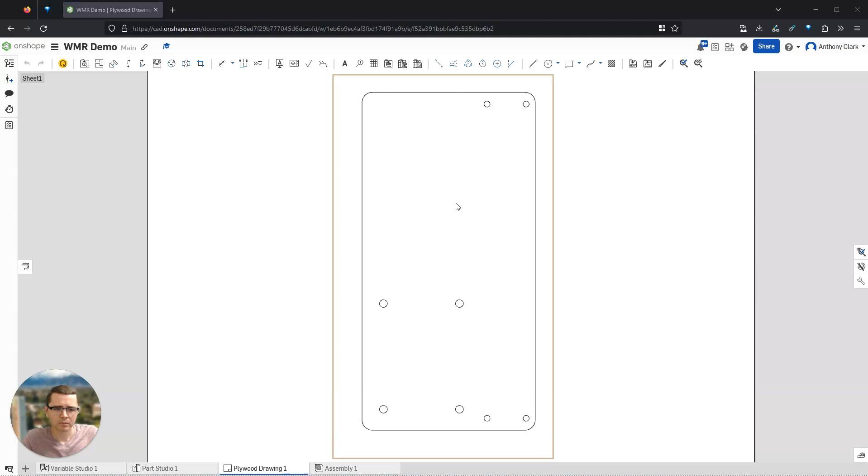Alright, we've seen laser cut parts. Now let's jump into creating a 3D printable part.

I'm going to create this in a new part studio, though technically we could do it in the same part studio we had here. Let's call this the chassis, and let's call this one a wheel.

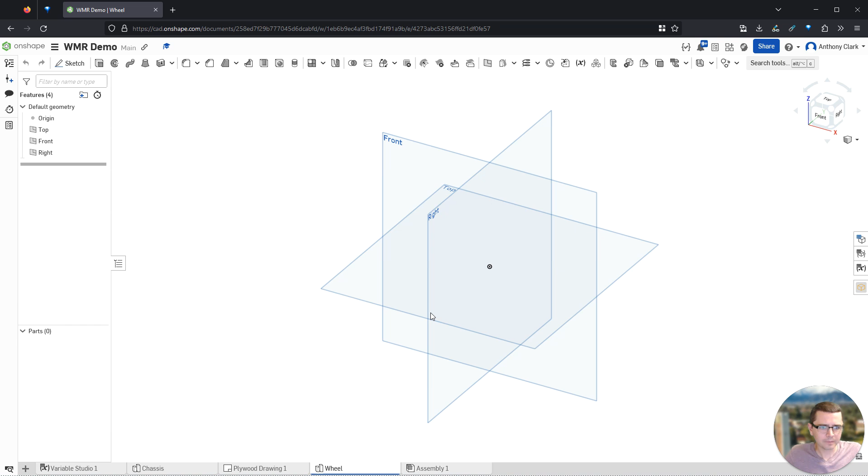Instead of on the top plane for this one, I'm going to create this one on the right plane. And since this is a wheel, it makes sense to make it a circle. This one is going to be a little more freeform, a little less.

Values from the variable studio that we already have defined. So we'll call this the wheel rim.

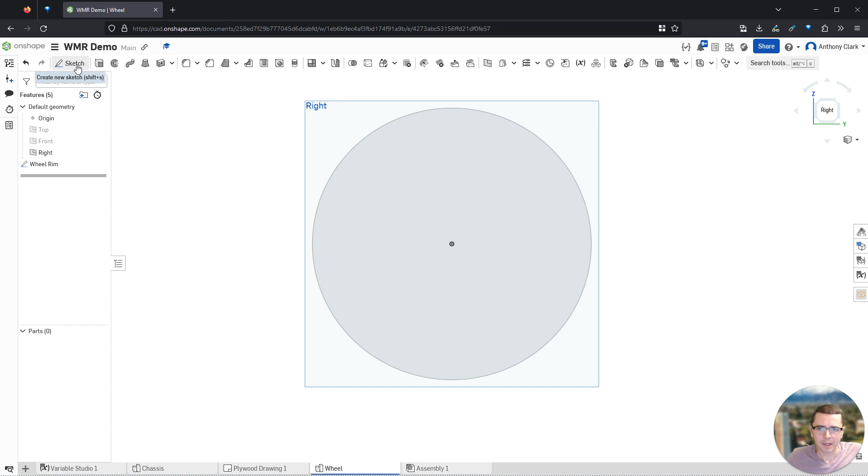And I can now extrude this. Extrude this part, and let's make this a certain thickness.

Sometimes it is nice to still have variables even if they're not defined in the variable studio. Maybe I'll need this dimension a few times still. So I'm going to type the pound sign and call this the wheel thickness.

Turns out I've already got that defined elsewhere. So let's call this the demo wheel, the demo wheel thickness. And I can click create new variable, and let's say that this thing is 0.8 centimeters thick, which I think is what I had before too.

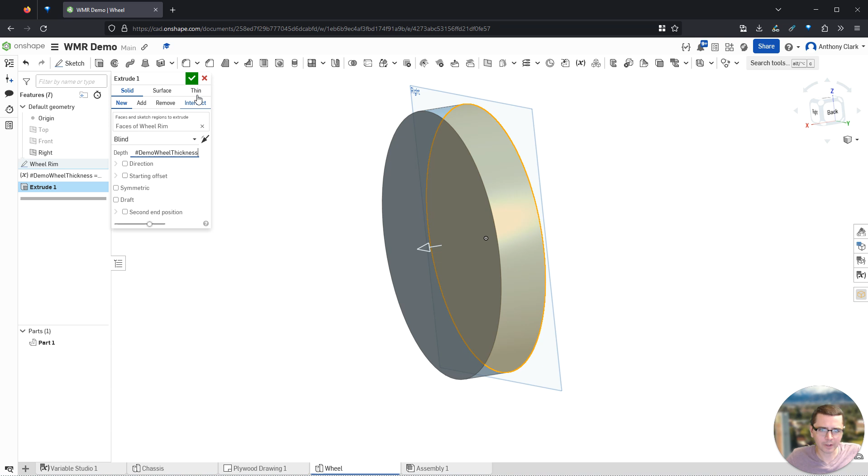You can see here I can create lengths, angles, just numbers, or any. We'll click OK, and let's call this the wheel rim.

You'll notice that it created the variable right here in place instead of in the variable studio. So this only shows up here. It does not show up in the other variable studio. Let's do something similar here.

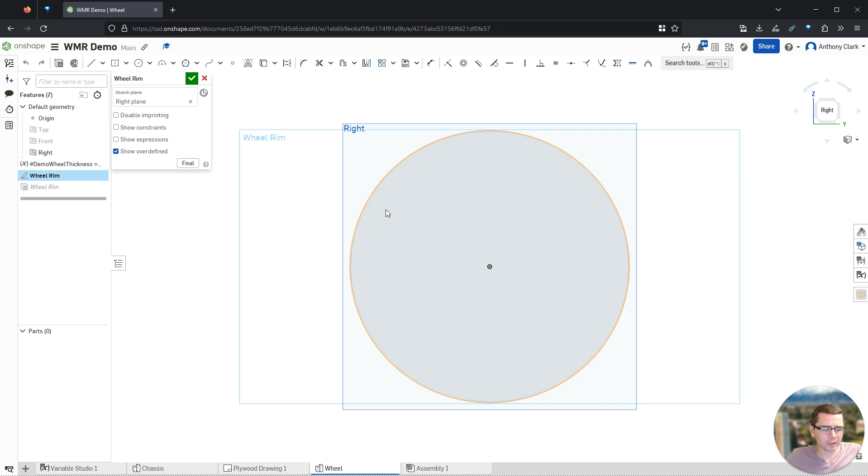I'm going to go actually and edit the sketch itself. I never actually dimensioned it. Let's dimension it to 7 centimeters, which is what the Pololu wheels are that I'm using on my demo robot.

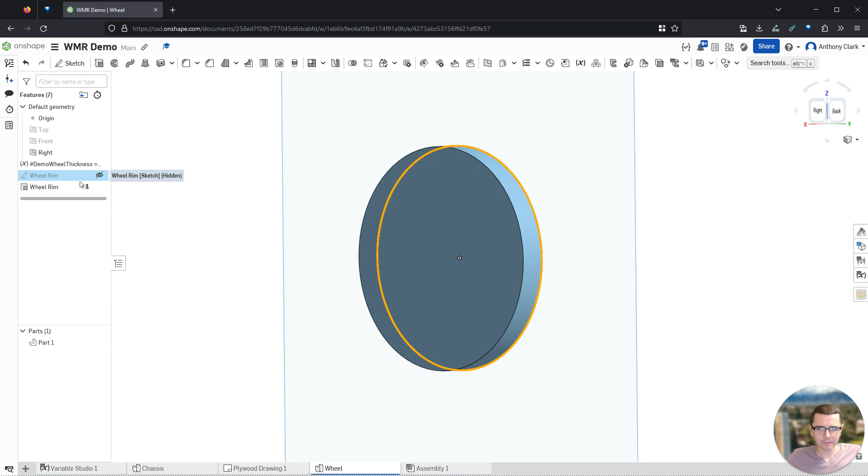Okay, so 7 centimeters. But instead of it being a full thick wheel like this that I'm cutting out, let's just do the rim. So I'm going to re-edit this sketch, do another sketch, do another circle, and let's see, how thick do I want this to be?

Let's leave that as it is for now, and let me show you a few extra little features here that are useful.

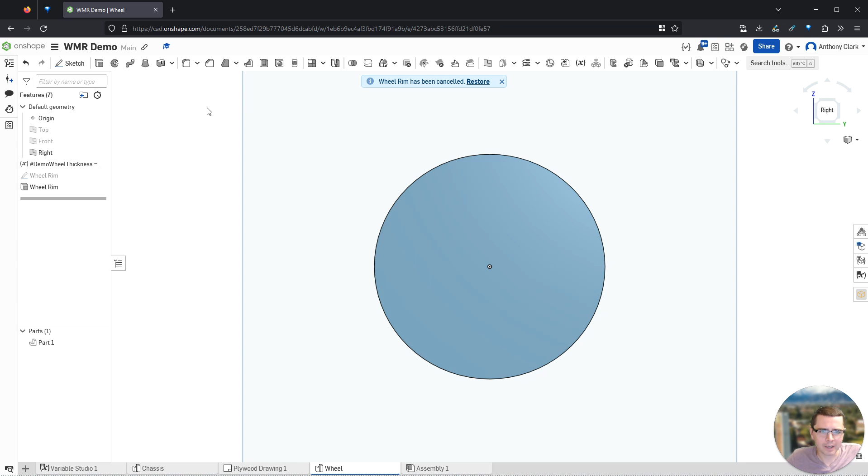Let's see, where do I create variables? Do I have to be outside of a sketch for that? Here we go. So let's click variable, and I'm going to do a measured variable.

And let's call this the demo wheel diameter, and let's just click on here. And I think, let's see, what am I going to get as the value?

Not generated properly. Let's see, it's a length. Not the edge, no. So is it a distance? Use an axis.

This may be a mistake. Measure the distance between the vertex and the edge. It's not complaining anymore, but I can't tell what that actual value is. 3.59.

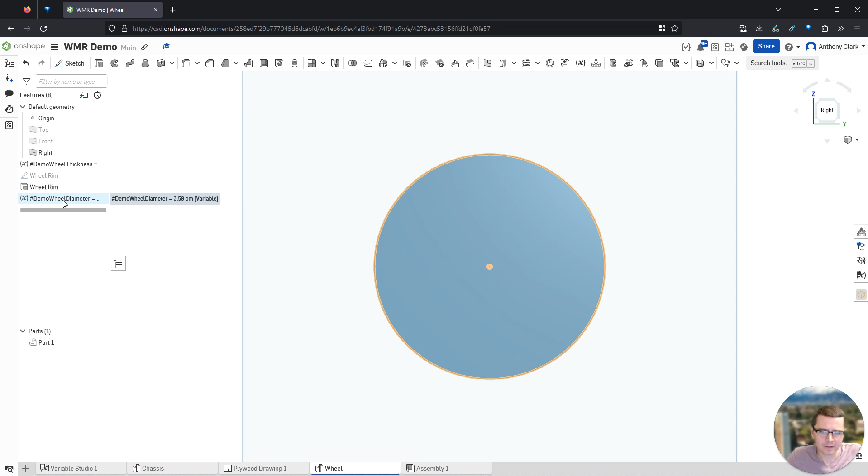I think I am not going to just try to fix this off the cuff here. I was just trying to show that you can create variables based on measurements.

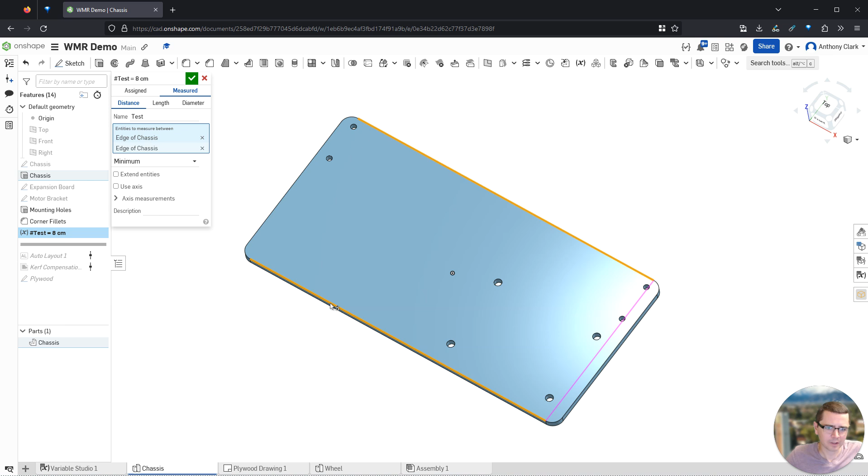So for example, let me just show you one that I know should work. I can create a variable, let's call it a measured variable, let's call it the test, and the entries to measure between - for example, I could select this edge and get the minimum distance, and it says it's 8 centimeters, which makes sense because that's what we made this length over here.

Let's not slow down too much by me trying to figure that out here on the fly though. Okay, so back into our wheel sketch, back to normal. I'm going to create another circle here.

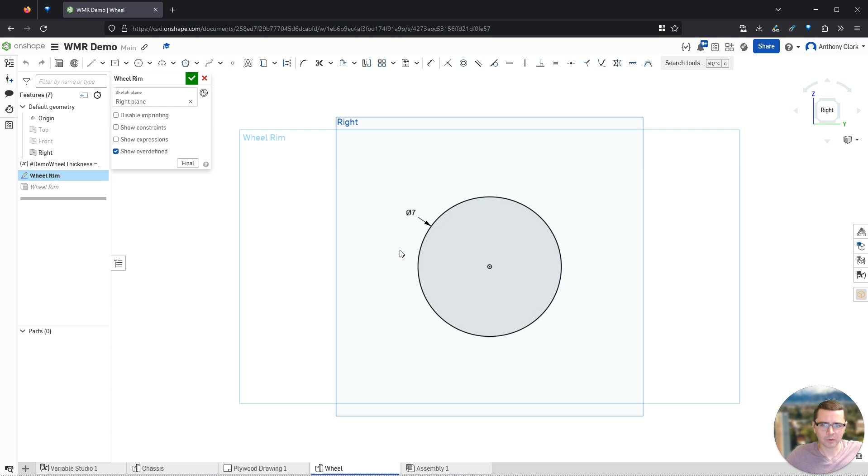And just manually say that this thing is 7 centimeters minus - how thick do I want the rim to be? Let's just try 1 centimeter to begin with. That seems pretty reasonable, 1 centimeter thick edge rim there.

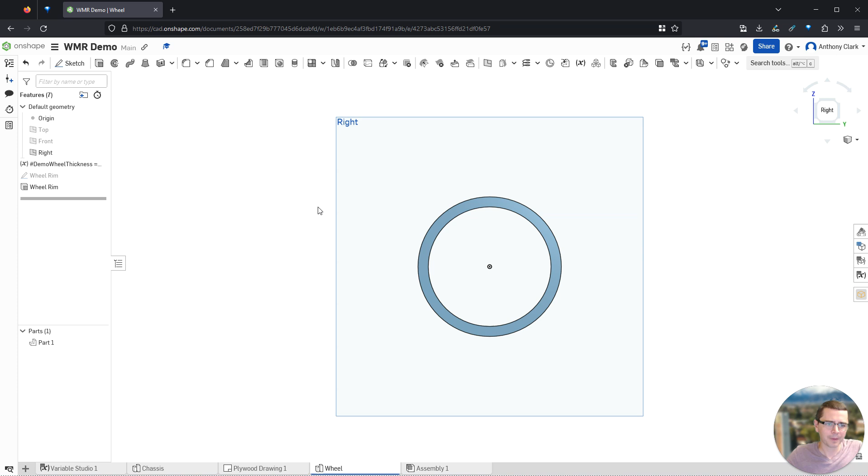And since I have both of those, you can see it essentially did a cutout for me. It just extruded the area between the two circles. Okay, but I'm going to have to eventually have a center hub here, and I need something to attach that to. So I'm going to take my right plane, create a sketch, click normal.

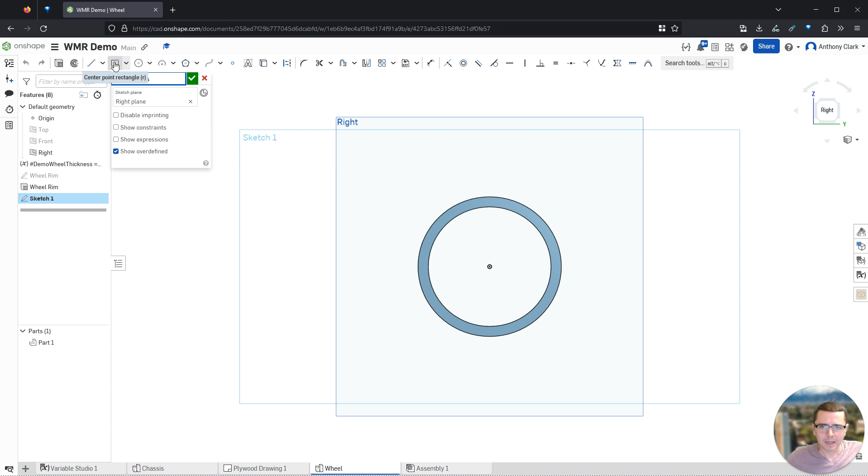Let's call these the cross spokes. And I'm going to be sort of just lazy here and do a center point rectangle and not care too much about the dimensions themselves.

Oh, let's see, the center spoke, let's see, 1.25 centimeters seems pretty reasonable. And now that's fully dimensioned.

Probably would be better to create a variable for those so that if I change one, it changes both, because now I might have to change them both manually.

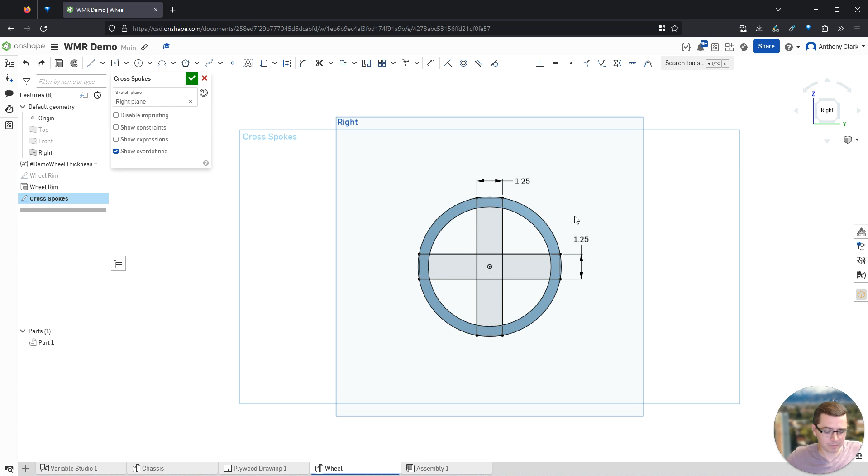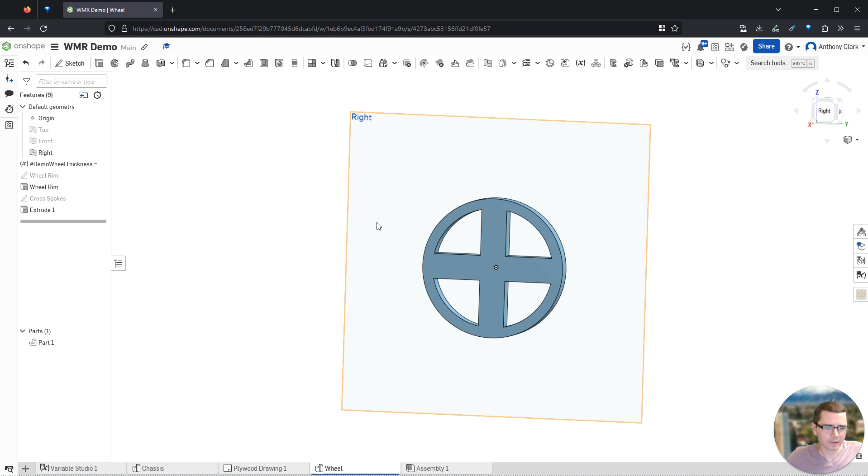We can do an extrude, and Onshape is smart enough to figure out the overlapping regions for that. And I should make this the same demo thickness. Alright, so now I have a wheel here that I can put a center hub on.

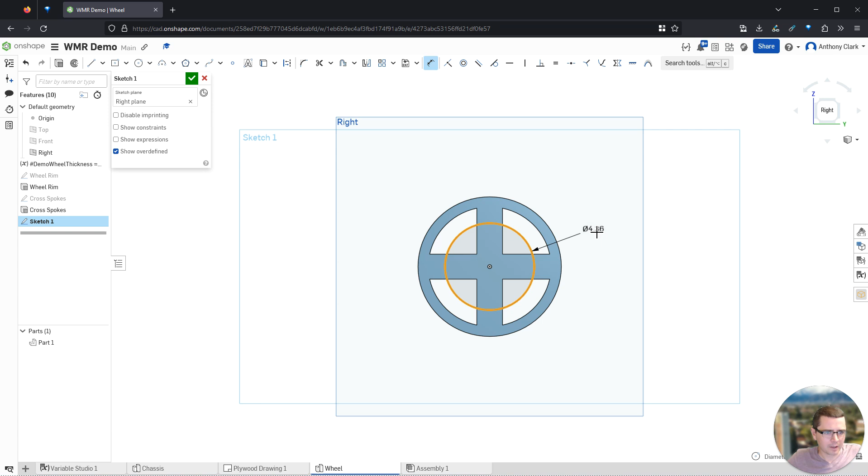I'll click on the right plane again, create another sketch, center circle, and let's call that 1.5 centimeters. That looks a little on the small side.

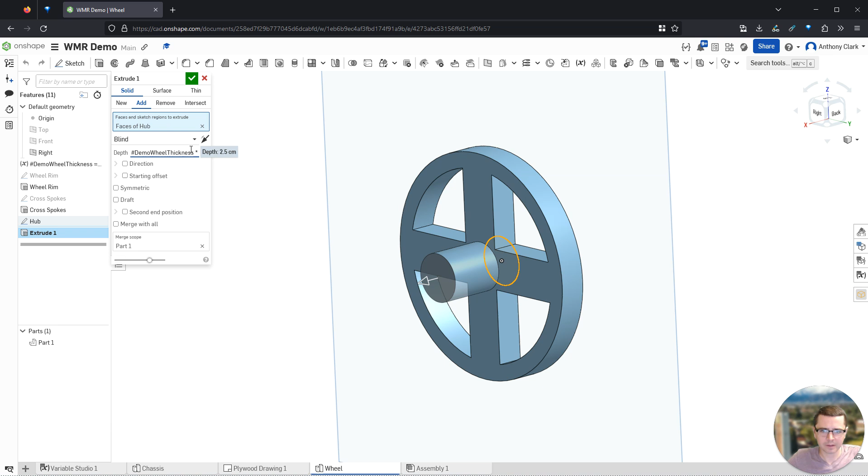I'll leave that for now though. Let's do an extrude, and let's say that that's twice as thick, so I can take the demo thickness times 2. Those are dimensions we'll probably want to edit as we go forward.

Now I need my hole for the shaft of the motor. So for this I'm going to click on this face and create a sketch.

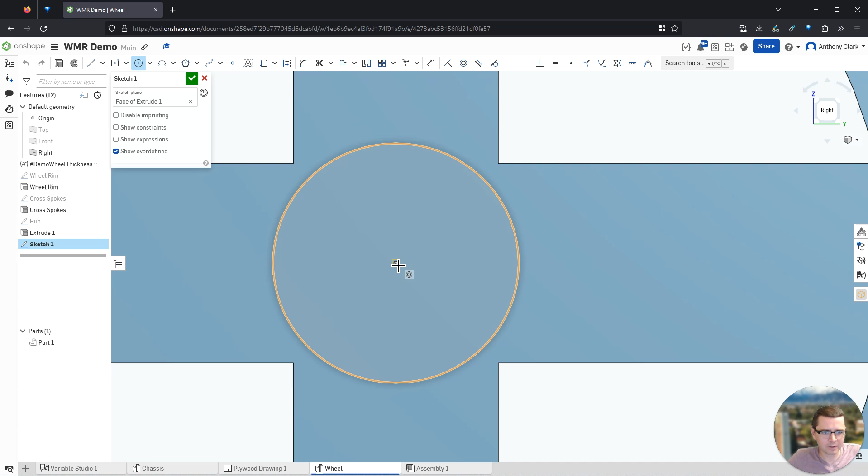Things get a little bit tricky here when I think about the motor shaft, because it's not just a pure circle. If it was a pure circle, as the shaft spun, it would eventually get loose from the wheel hub, and it would spin free, and the motor and the wheel wouldn't rotate.

So if I look at a gear motor from Pololu, you'll notice that the shaft has a flat top to it here. Is there a better look? That's probably good enough. They basically shaved down one of the sides of the shaft.

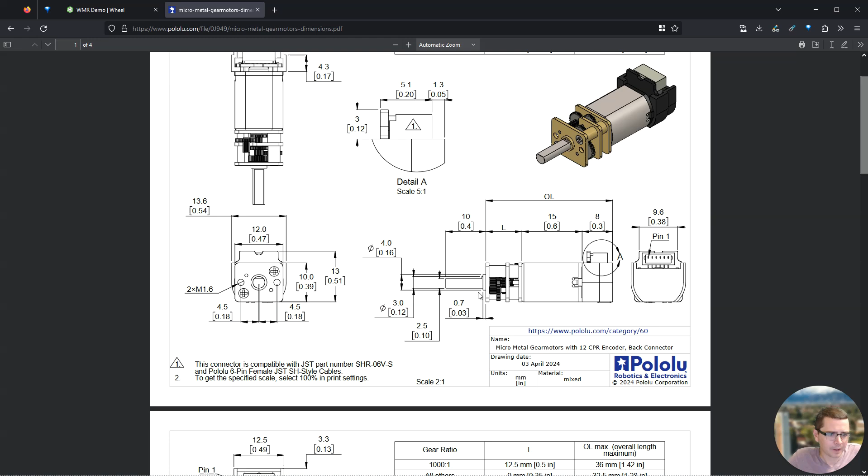If you look at the dimension diagram for it, it'll actually tell you exactly how much it got shaved down by. The dimension of the shaft itself is 3 millimeters. So I can come over here and make this circle 3 millimeters, or I could say motor shaft, since I've already got that value.

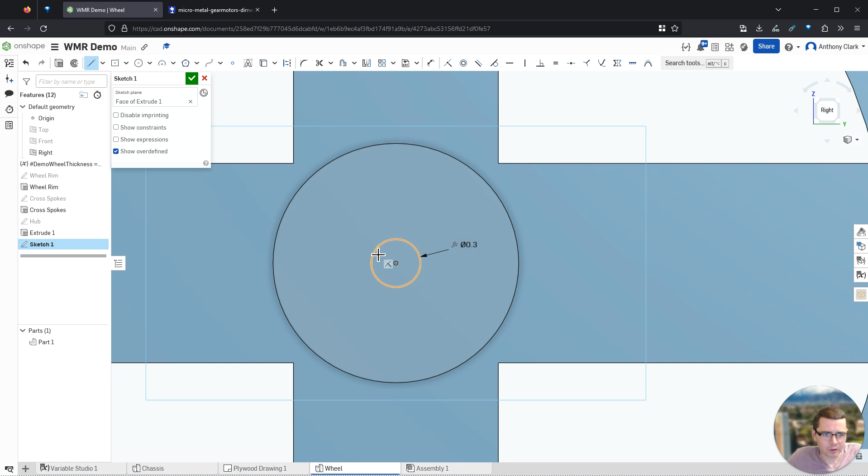And now I have a few different ways to handle the next part. I'm going to do this by just drawing a straight line that connects to both parts of the inner circle here.

Now what's left is to position this. You can see it's blue because even though it knows this point is connected to the circle, and this point is connected to the circle, and that it's a horizontal line, it doesn't know exactly how far away from the origin it should be.

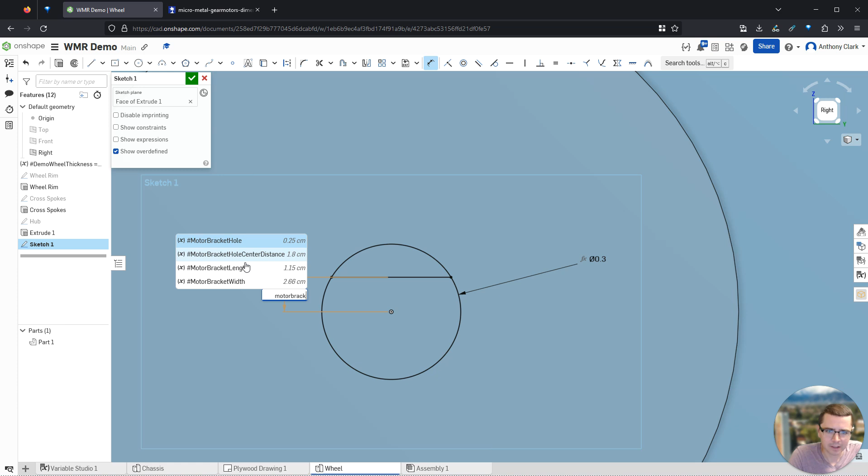So for that, I have another distance here, which is the, oh sorry, not motor bracket, motor shaft - the diameter from the flat side.

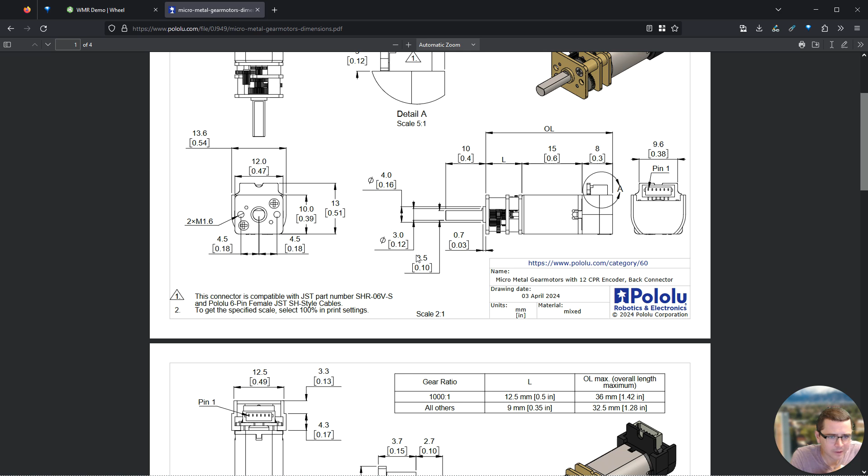That's going to say it can't be resolved because I took that 2.5 from here, this 2.5 value, which is the shaved down part of the shaft. So I need to actually do some arithmetic to come up with the correct value here instead.

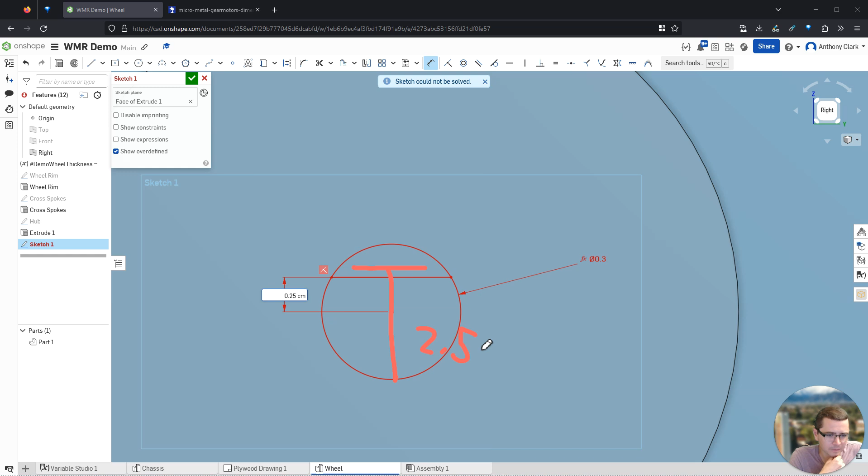So if from here to here is 3 millimeters, and from where the line should end up, let's say it's here, to here is 2.5, we can compute what this distance here is essentially.

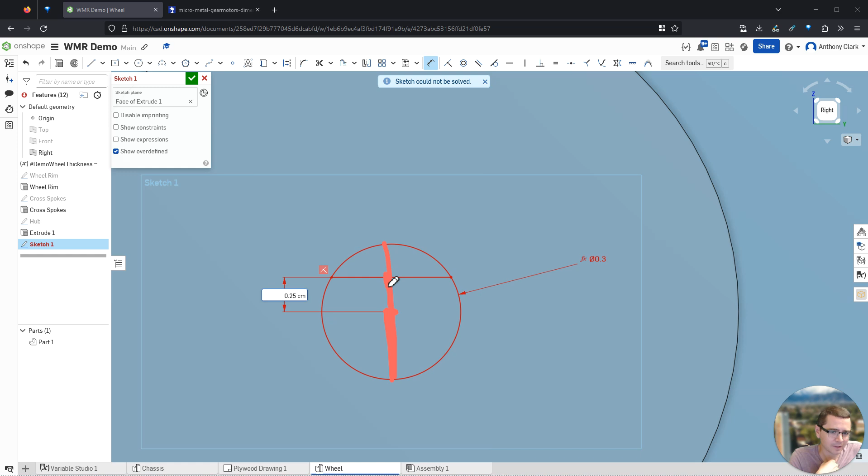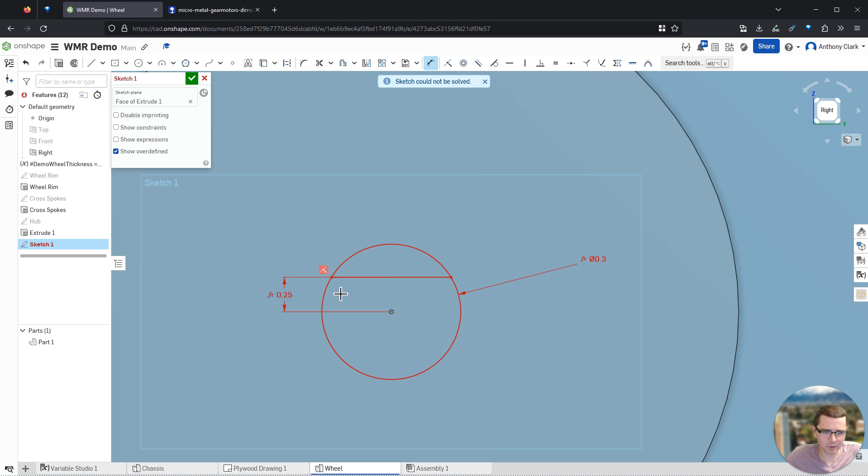So that distance is, sorry, not 3 millimeters - yeah, the full distance is 3 millimeters. So this distance here is half of that, 1.5 millimeters. And the distance from here to here is 2.5 millimeters minus the 1.5 millimeters from the bottom part. So we should be able to say motor shaft diameter flat minus motor shaft diameter divided by 2. That gets us into the correct position here for the part that we'll cut off.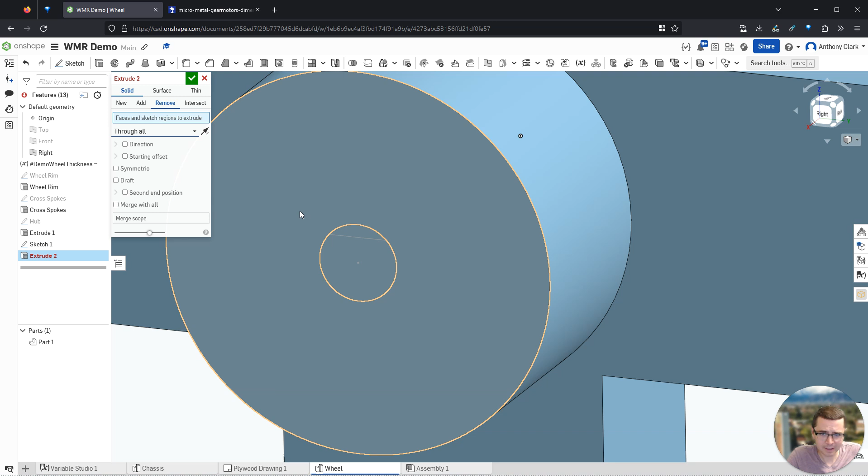Speaking of which, if I were to complete that sketch and then try to do a cut - let's call this a remove, and say through all - it's going to be a little bit confused, and in fact it just won't let us. If I click the check on it, you can see it did not properly generate the part. That's because even though the sketch is fine, it doesn't know how to turn this line and circle into a single part to extrude in one dimension, along one axis.

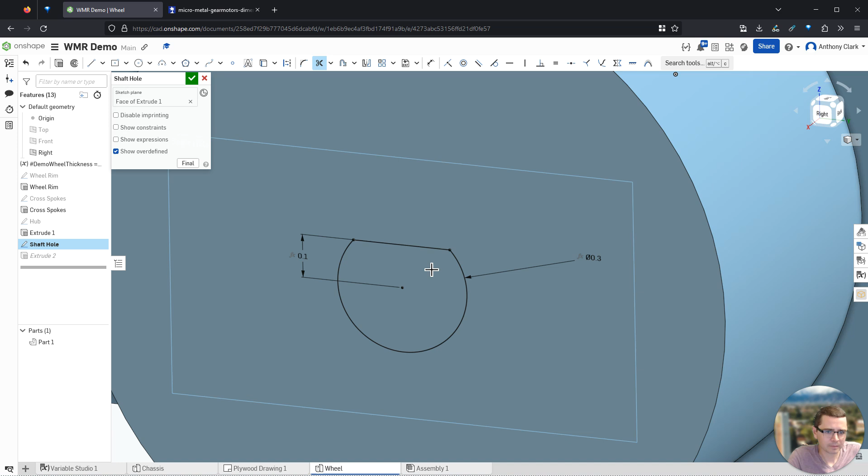So what I need to do is essentially get rid of this top part of the circle, which I can do with the trim tool. So now that's gone, and my hole should now extrude.

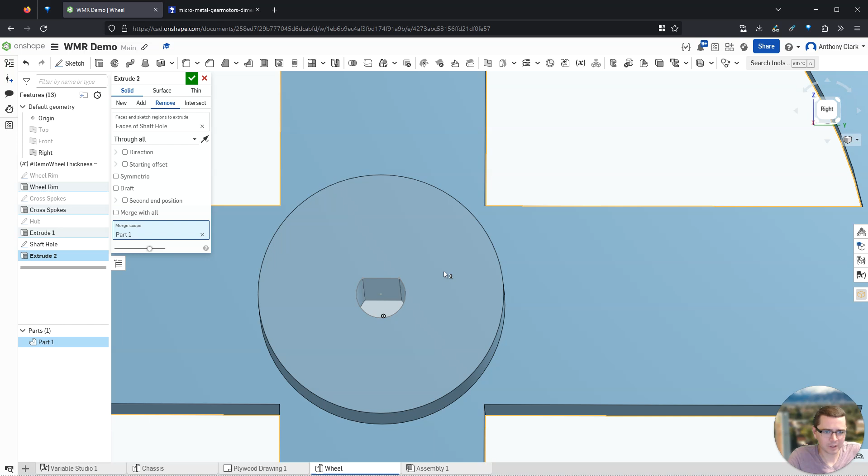Maybe part of the problem was I didn't actually click on the correct face or merge scope. Come on, merge scope - there we go. So now it knows to extrude that shaft all the way through the entire part 1.

And so let's rename this part 1 the wheel, and we can rename this the hub, and rename this the shaft.

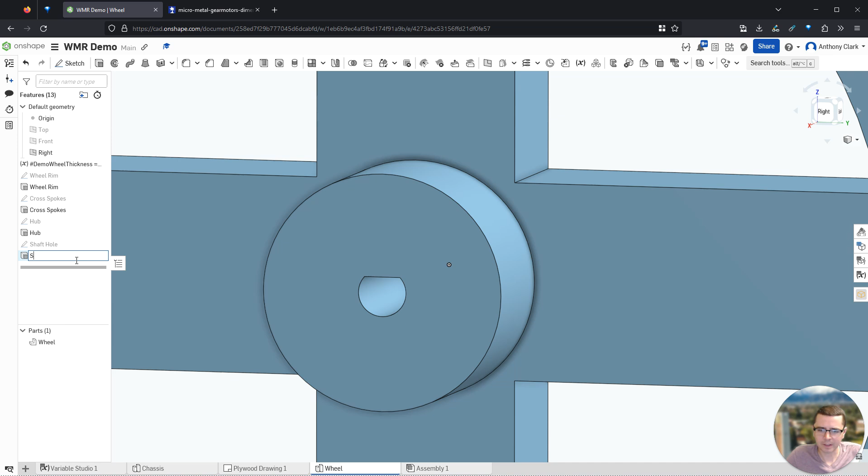Okay, so now we have something that we can put onto the motor itself. The problem is, unless it's perfectly friction tight on there, it's likely to come off, and it's likely to have a little bit of a wobble to it because we're not going to get it perfectly on there. So one thing that I like to do is use what are called set screws.

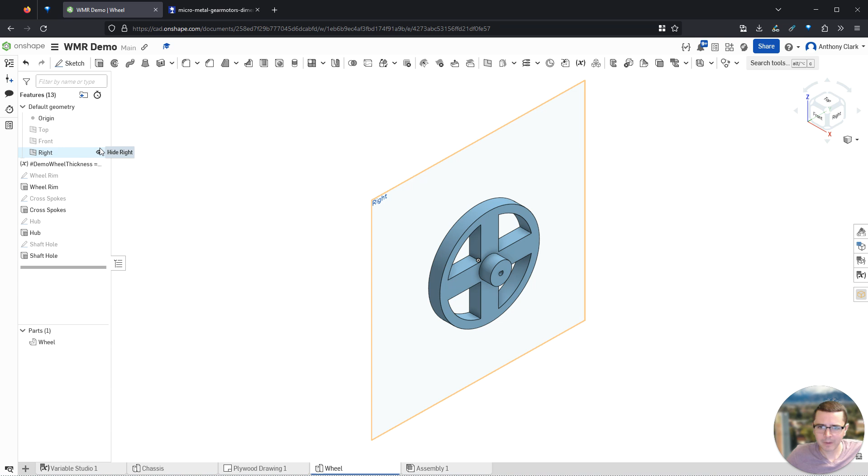So I'm going to bring back in the top plane, create a sketch on the top plane, and we will create a construction point parallel with the origin and dimensioned from this line here.

Let's see, do I have an equation for the thickness of the hub? I think so - I think it was the same as the demo wheel thickness. It would probably be worth creating some more descriptive variables instead of just ad hoc remembering that the hub was the same thickness as the wheel itself. But here I've put the construction point at the center of this width, and we know it's centered vertically because I have it centered on the origin.

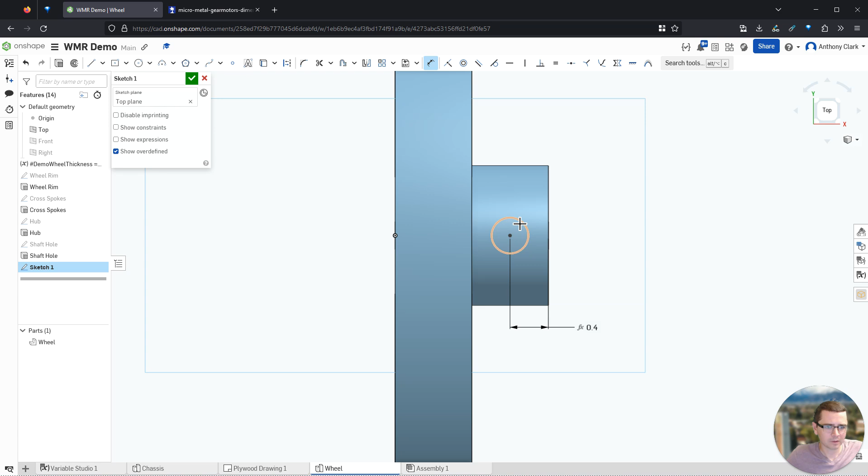Now I can do a hole, and let's just say that we're going to do an M2 set screw. So I'll do an M2 hole.

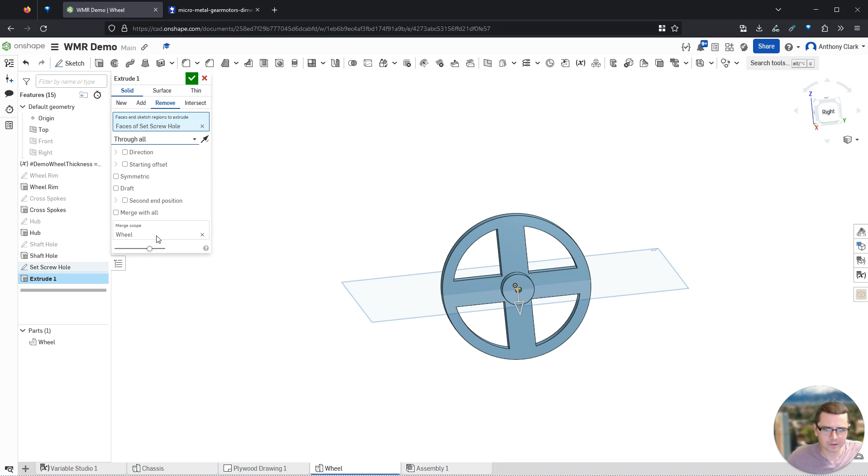And this is the set screw hole. I can do an extrude, and this time I'm going to do remove. Instead of doing a remove through all, which would do it in both directions—actually it does just do it one direction, so I'll flip the direction there. I'll do an extrude through all in one direction. If I wanted to, I could make it symmetric and go in both directions, but let's turn off being symmetric. So that's the set screw hole.

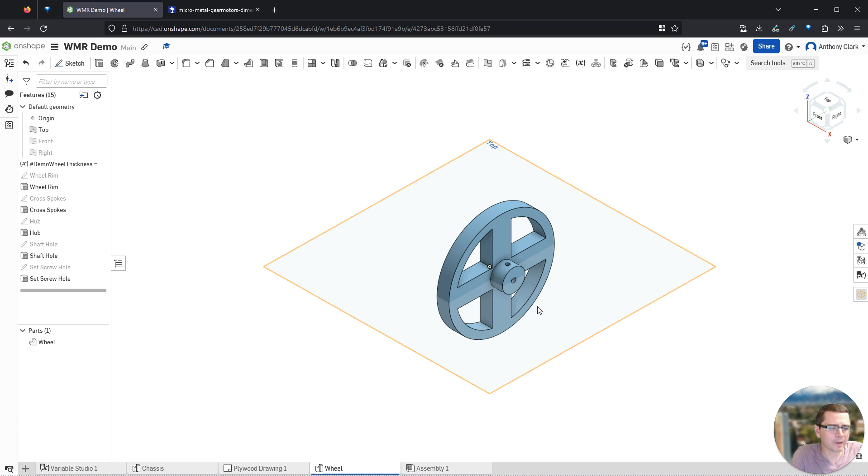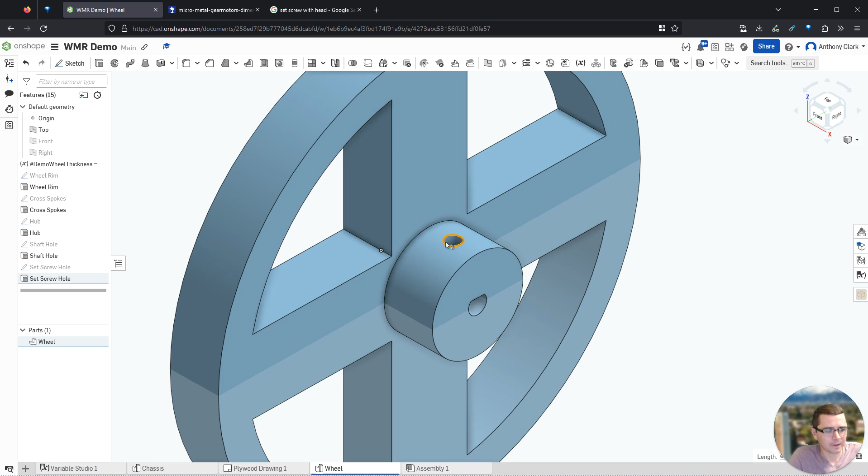So that's the hole of the threaded part of a set screw that I want to go all the way down. Let's say set screw, to show you what one of these looks like. I'm picturing something like this one here that has a head at the top of it. The one I have uses round heads. So essentially what I want to do is create a rounder part here for the head to sink down into the hub as well, and then I can just use a screwdriver to screw it down in.

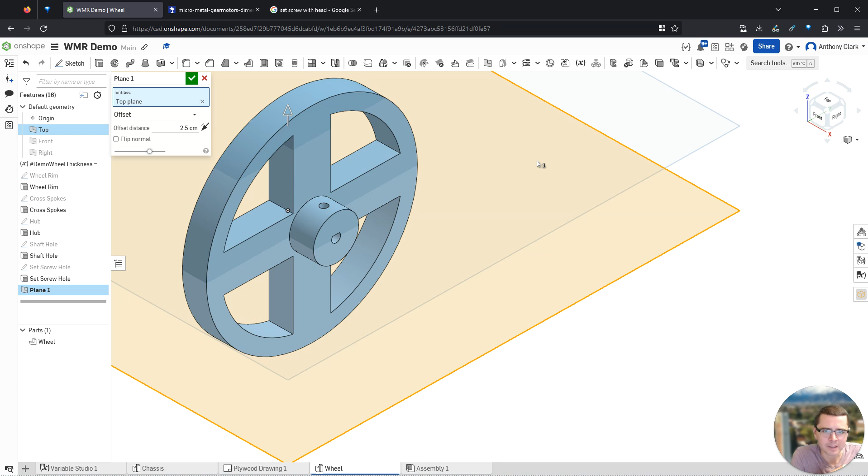So what I'm going to do is create a new plane, called a new sketch plane, because I want to sketch here at the top of this surface instead of all the way down below. So where is sketch plane? Here's a plane. I'm going to make it an offset from the top plane and bring it down. What do I have the hub radius at? That's at 0.75.

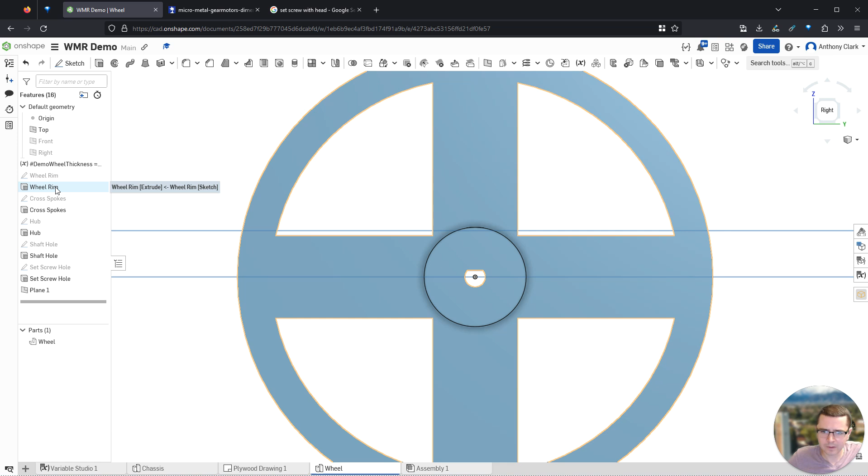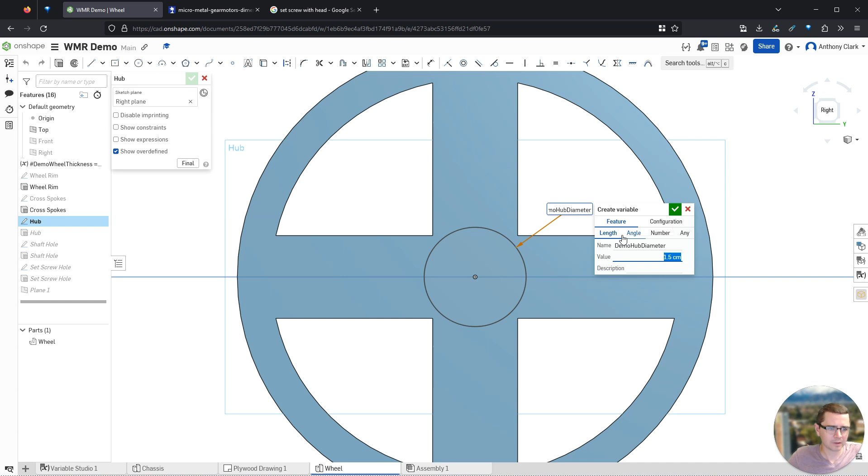That doesn't look quite right. Let's look at the hub. The hub has a diameter of 1.5, and this would actually be a good point—let's call this the hub demo hub diameter, create a new variable, so now I can use that when creating my plane here, divided by 2. So now that sketch plane I created is perfectly at the top of the hub.

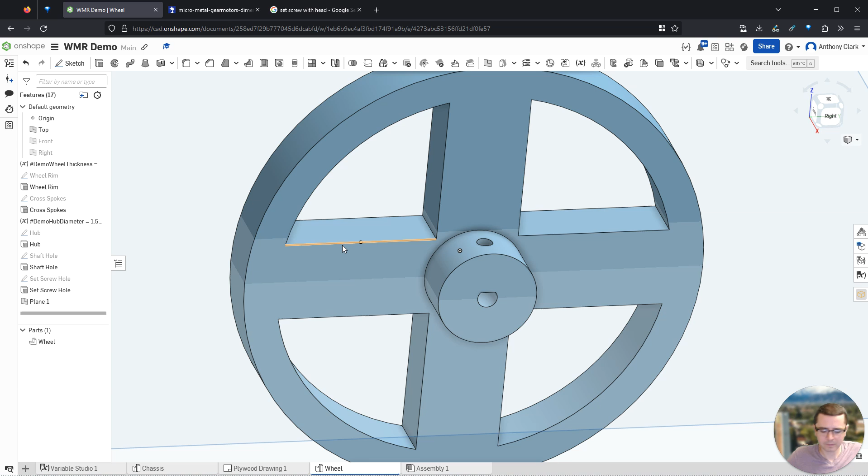So I'm going to hide the top plane and click on the sketch plane I just created, create a new sketch, and do a center point rectangle. Let's do a construction and use—I think I should be able to grab that. And now I can do a center point circle. Oh, I still was in construction mode.

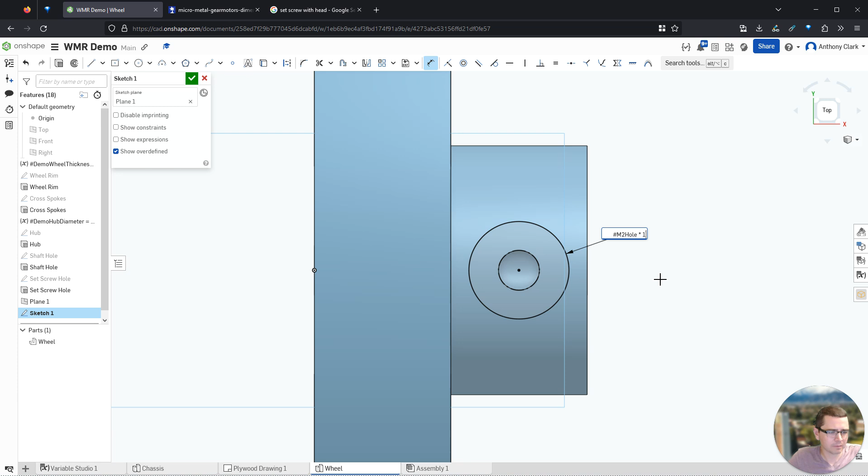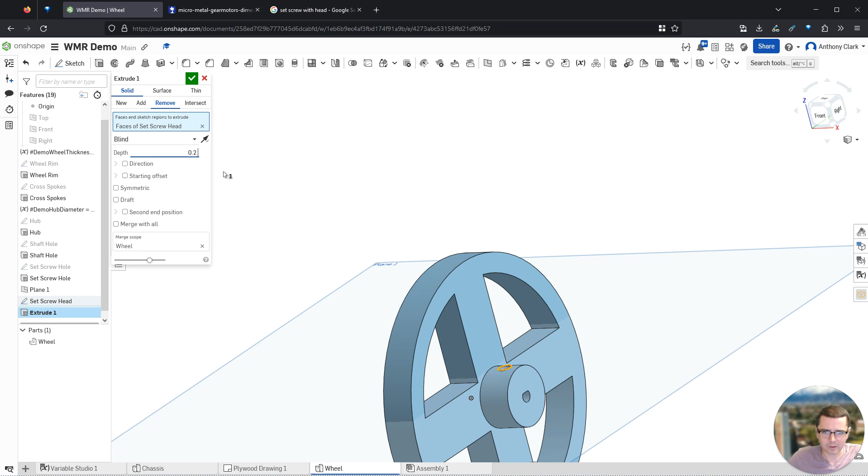Create a circle, and let's say the head of my set screw—it's an M2 set screw, and let's say the head is just 20% larger. That seems a little small, let's do 40% larger. Let's call that the set screw head, and do an extrude. We'll do a remove, and let's go 0.2 cm. How does that seem?

Normally I would just measure these, but I don't have these measurements in my variable studio, so we'll just say that's reasonable. So now you can see the head will sink down, but the set screw itself will go all the way down into the center shaft.

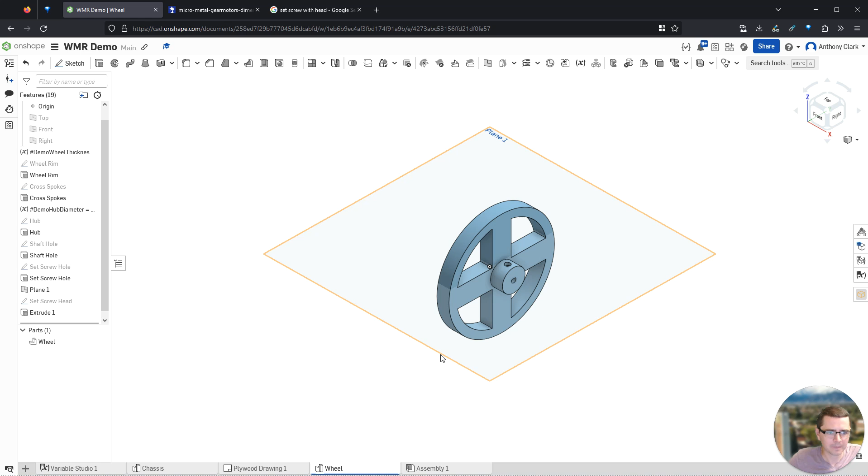Alright, it's pretty common to have multiple set screws. So this might be the set screw that goes into the flat part, but to make it adjustable so I can easily get rid of wobble, it's handy to have multiple set screws. So here I'll show you how to create 3 separate set screws. And let's hide that plane.

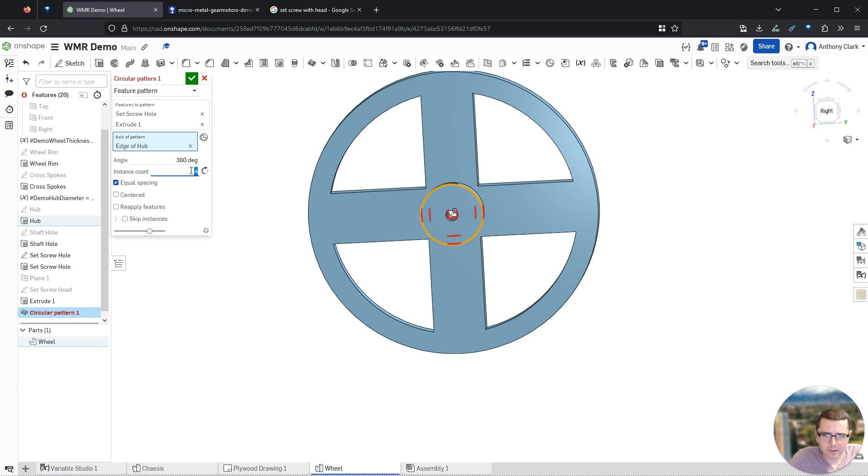So instead of redesigning additional holes from scratch, I'm going to use what's called a circular pattern. This is going to be a circular pattern, not a part pattern, but a feature pattern. I am going to feature around—feature the hole that I have there and the set screw hole as well, around this axis. And let's just do 3 of them.

Reapply features. And now I have the space for the head, space for the set screw, and all 3 come into this center shaft, so I can have set screws coming in from 3 different directions.

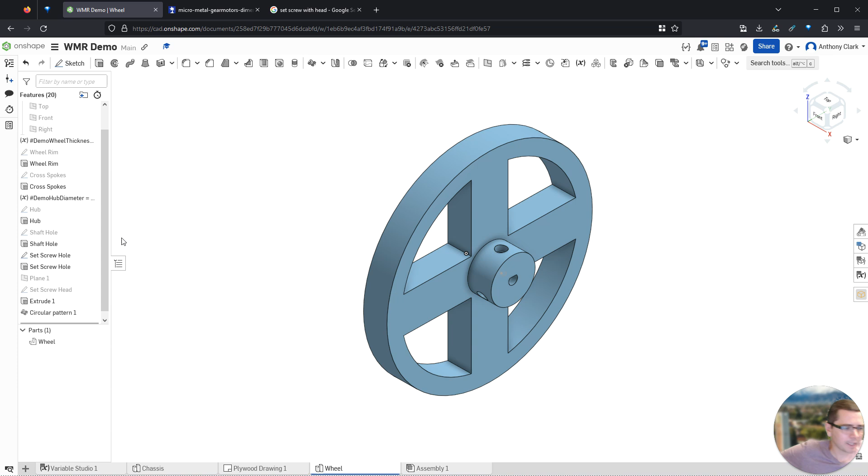Alright, just like I like to have smooth edges on my laser cut parts, I also like to have smoothed out corners on my 3D printed parts. So for that reason I'm going to add some fillets here for strength. They also just make the parts look nicer.

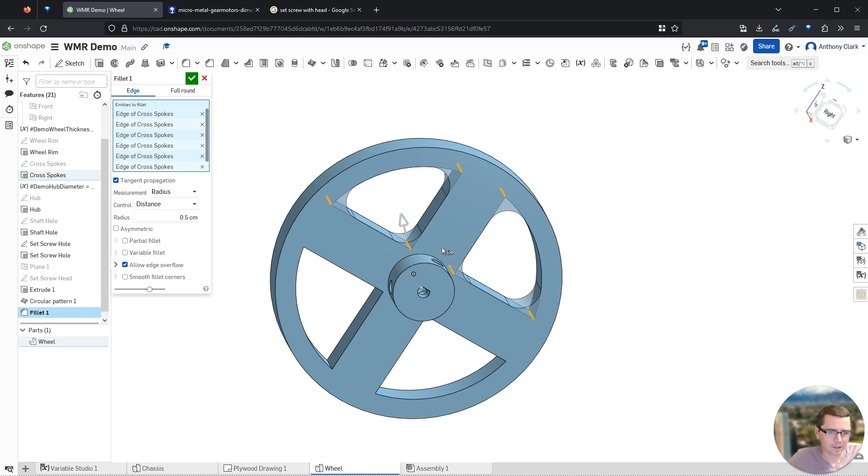And that actually looks pretty reasonable. Now this one is for strength—I'm going to add a separate fillet around this, just to make sure that hub is nice and strong and it's not likely to break. The rest I do want to be flat.

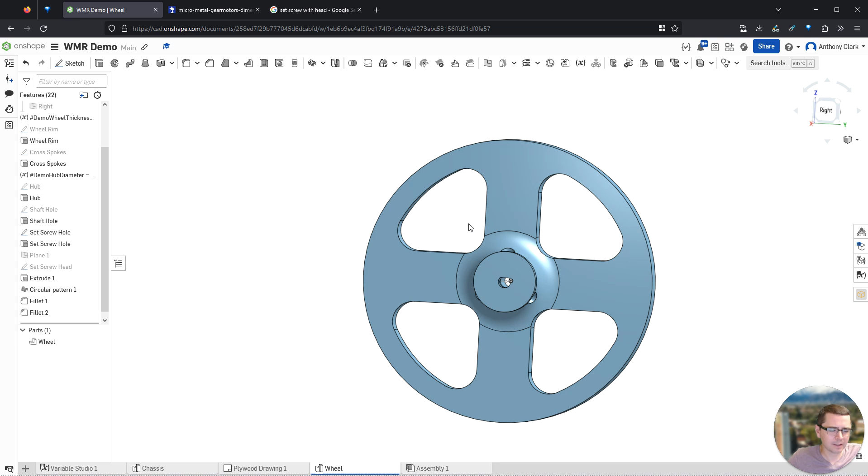I've also found that with 3D printed parts, this hard plastic has really low friction, and so it doesn't work on most surfaces—even carpet, it has a tendency to slip. So I like to put a rubber band around the edge of my 3D printed wheels, and the rubber bands will stick better if we give them a little indentation to go into. So for that, I'm going to sketch on the front plane.

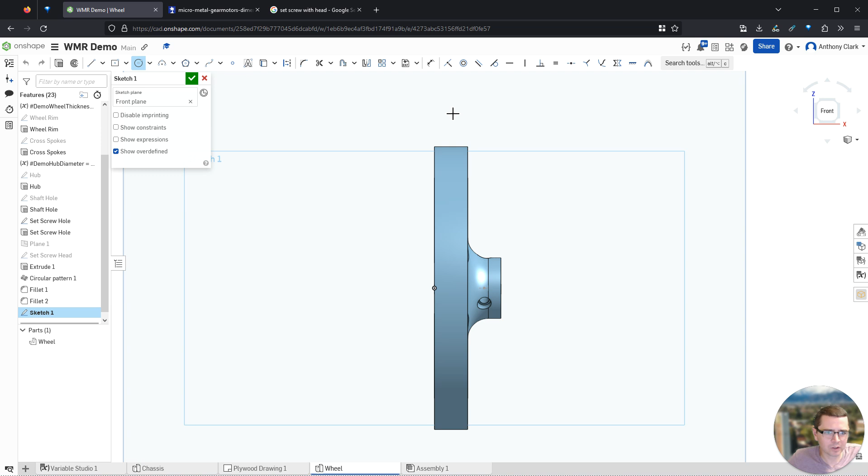And what we're going to do is just create a little cutout here that goes all the way around the edge of the wheel. So probably the best place to start would be to do a construction use and take this top line here.

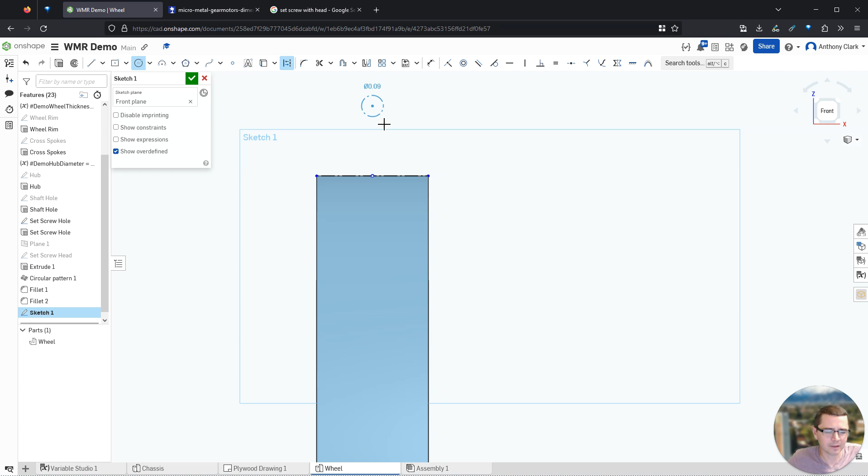Then I can do a construction point in the center, and now I can have a circle that I can dimension off of that. That's a construction circle, which won't do the sweep feature I want, so I'll undo that. I'll do a new circle, line it up, and now this circle will do what I want it to.

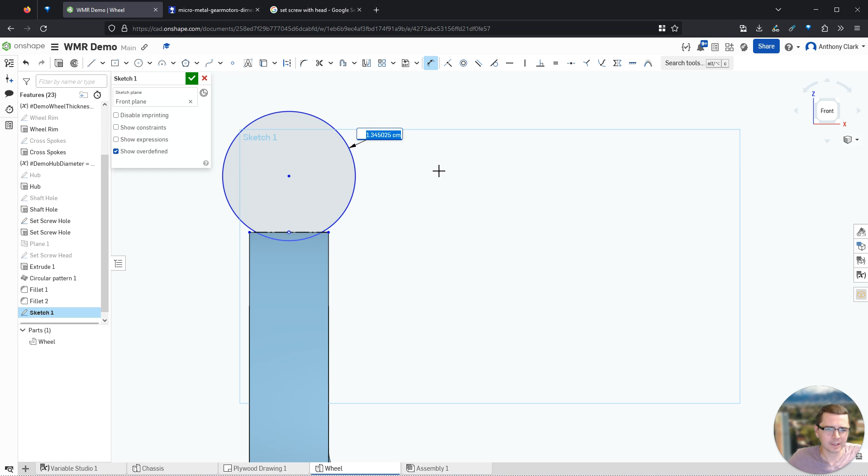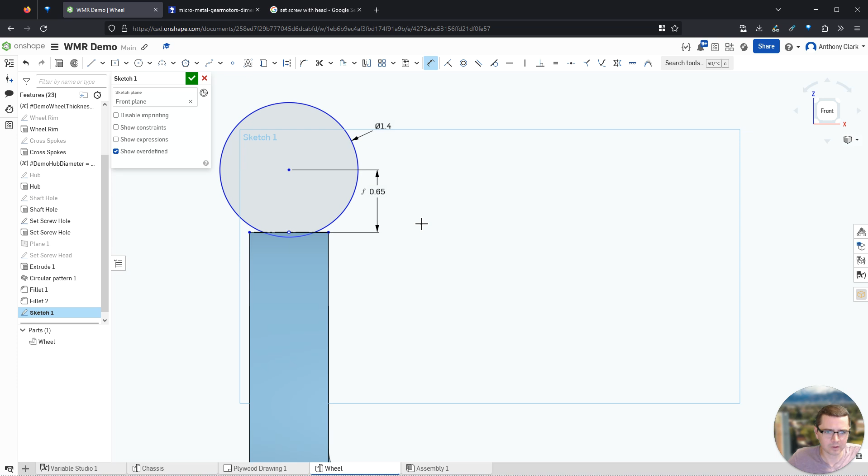Let's see, 1.3, that seems fairly nice. Let's make it 1.4 to make the hole a little bit shallower. And if that's 1.4, the distance here should be like 1.4 divided by 2, which means there's no cutout. Let's take out a little bit of a chunk. 0.1 centimeters, that's a little more than I'd want for... let's try half that, a little more than I'd want for just a slot for a rubber band.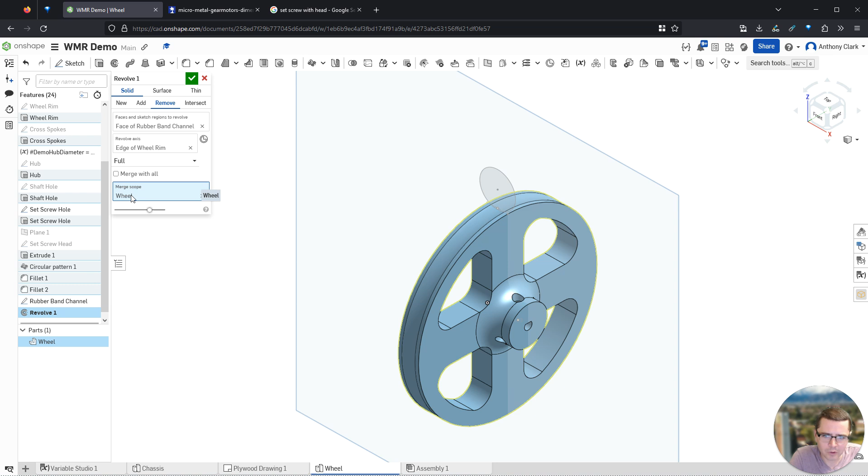Okay, so now we have a sketch, and I can revolve that all the way around the wheel. If I can remember how to do that, I think it's a revolve, and we're going to do a remove, faces and sketch regions to revolve. So we're going to revolve this thing around... see if I click, was that the correct axis? No. That axis. And we're going to remove from the wheel, and it automatically picked that up because it's the only part. So now you can see I've got a little groove here that means when I put a rubber band on there, it doesn't slide off all the time.

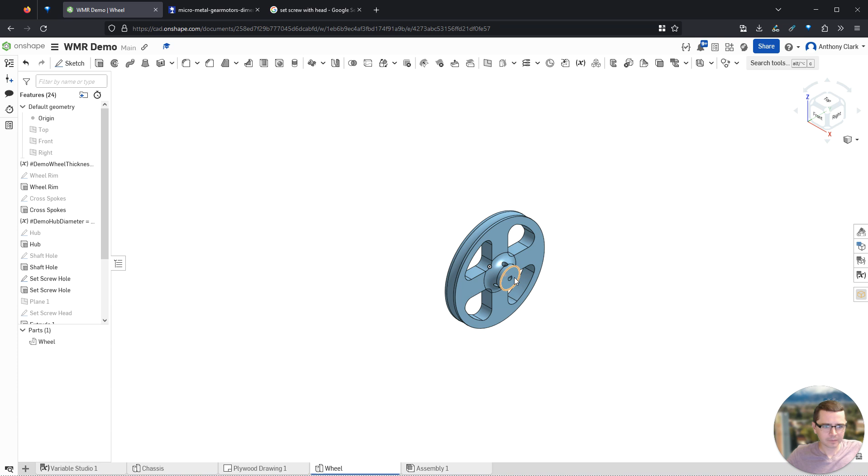Okay, one last part, one last feature to add to this wheel. If I were to put a set screw down this hole, it's likely to get loose over time. One thing to help something from getting loose on a set screw is to also add a nut. So what I'd like to do is slot a nut in through the face here, and then have the screw come down from the top, screw through the nut, and then screw down into the motor shaft.

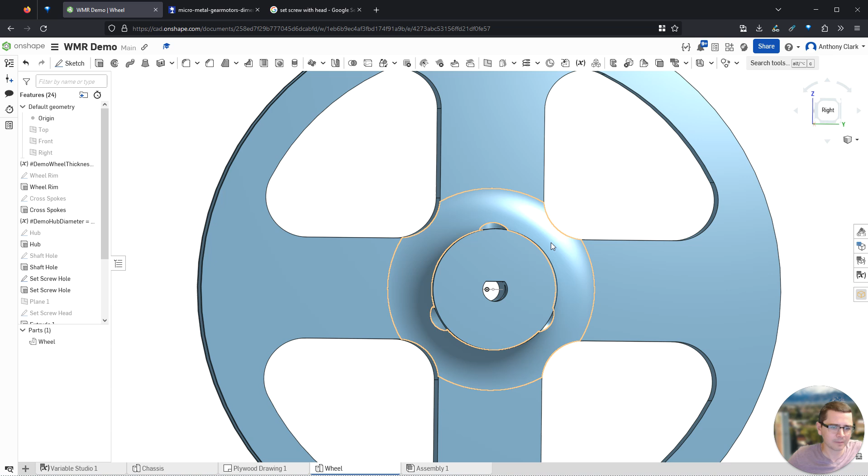So I'm going to sketch on this front plane here, and from the side a nut looks like a square. These are dimensions that actually do work for the nut I'm using. I just happen to remember offhand, but normally I would put these into the variable studio. I'm trying to not make this video too long and boring here.

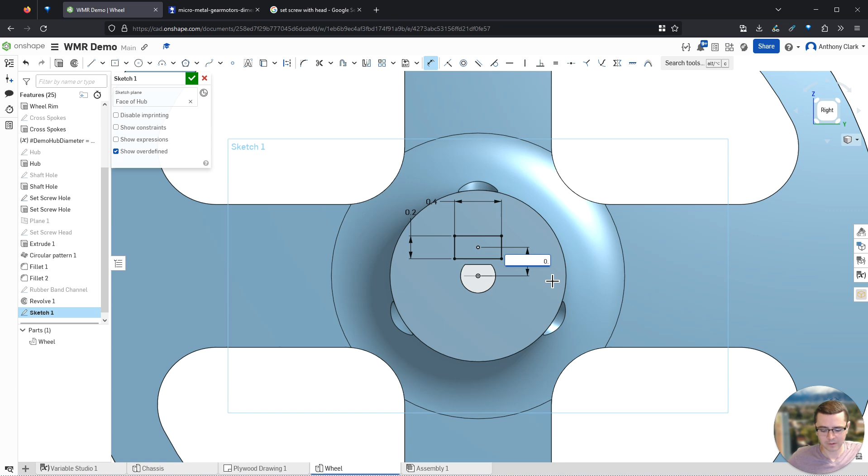Okay, so those are not fully dimensioned because I don't have them a specific distance away from the middle shaft. Let's just move them 0.35, and I don't think that will interfere with the head slot.

So now I can cut this in with an extrude, remove, and let's see, this should go the thickness, demo thickness.

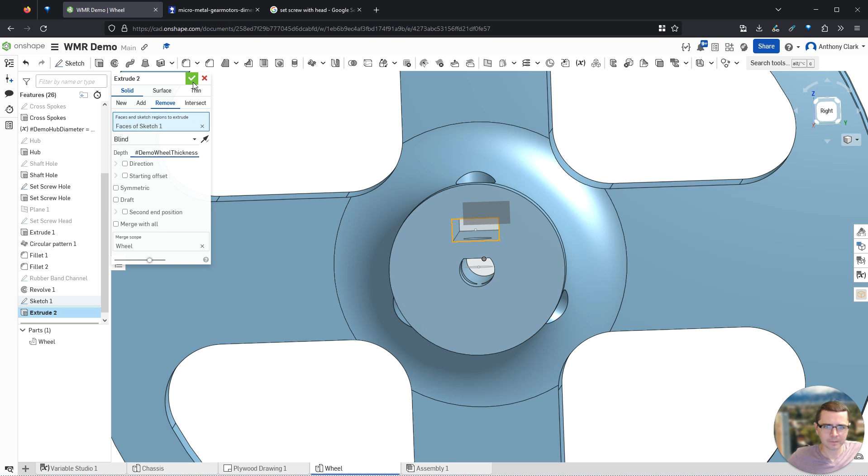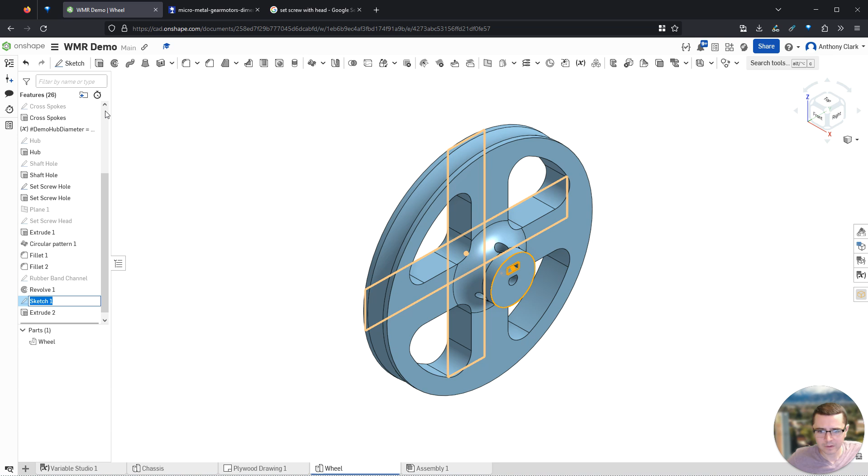So now you can see I can put a nut, a square nut, hexagonal nut, into here and screw down into it. One problem you might see is I don't have that same feature for my other set screws. But one nice thing is, if I move these up, let's call this the nut cutout, if I move both of these up above the circular pattern, I can then edit the circular pattern and add that as another feature to pattern.

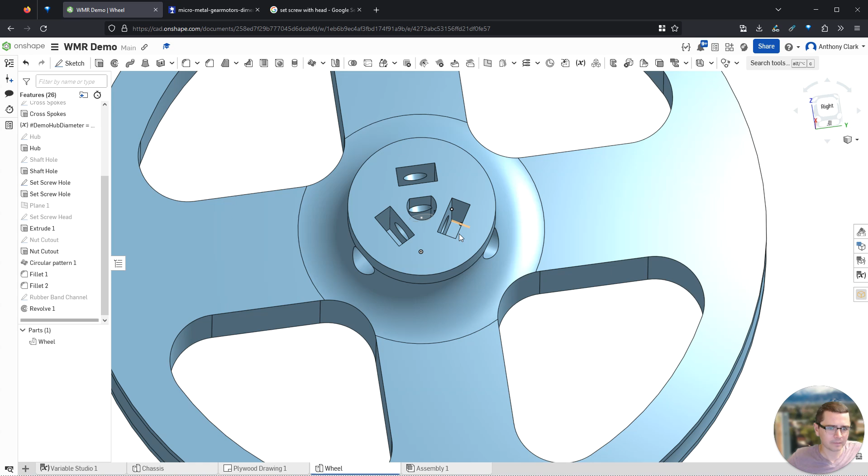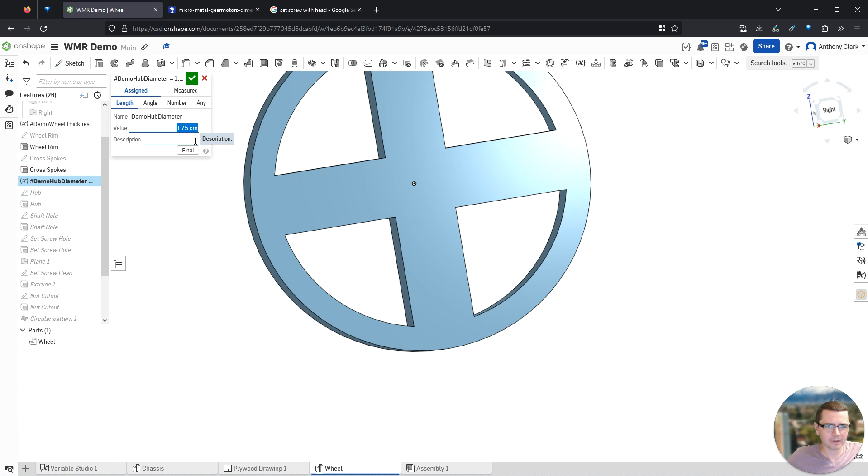This is starting to look a little like Swiss cheese, probably not going to print very well. So what I would probably want to do is increase the hub diameter. Let's call that 1.75. Give it a little more space everywhere.

Since I didn't dimension all my other parts off of that, you can see they still stayed fairly compact. So as you start to play around with creating new parts, you'll find, okay, well, I know that I want this nut cutout to move whenever I make this hub larger. So instead of dimensioning it off this bottom part, maybe really what I should do is dimension off the outer edge, which does move in fact.

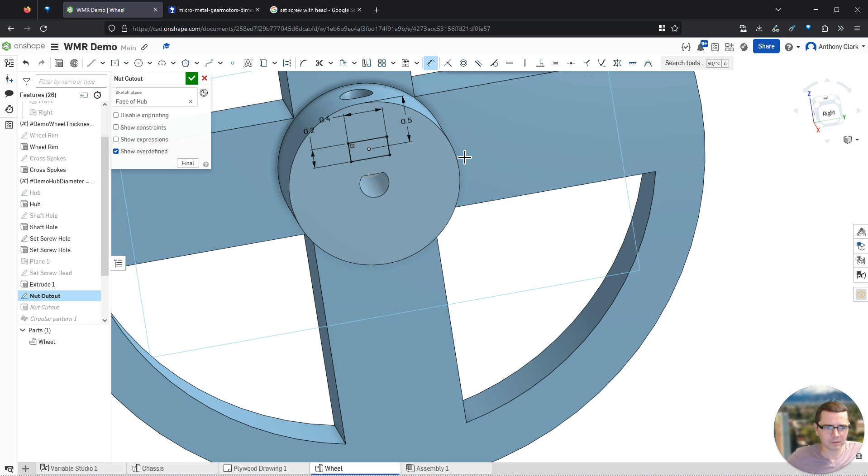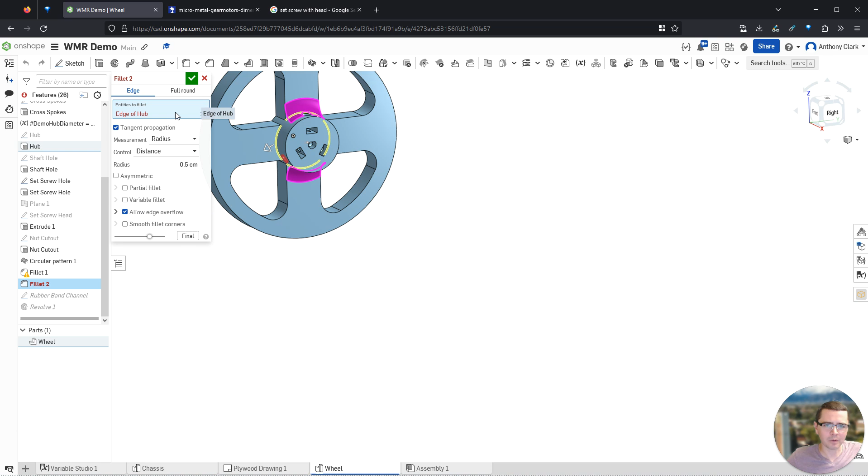And now if I were to go back and make this even larger, these parts all stretched out a little bit more as well. It does now not like some of the fillets that I've got constructed, because this line here is now broken, so it doesn't know what to do with it. So I can actually just recreate that from scratch, and it'll learn to live with it under certain circumstances.

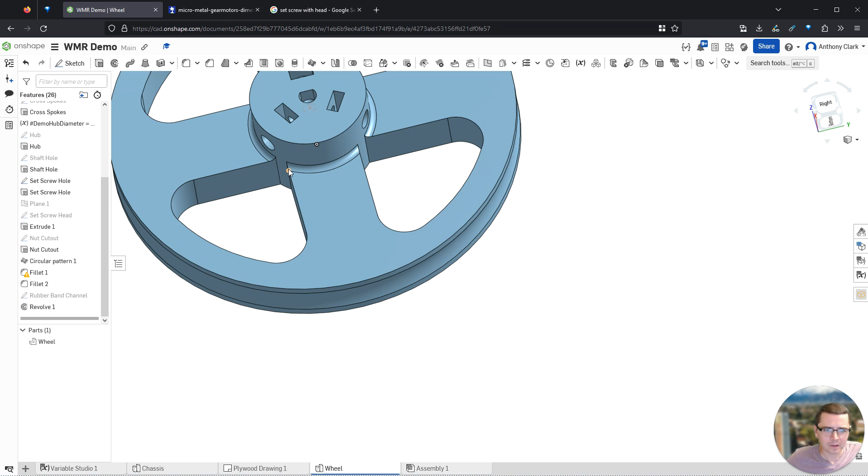Apparently not this one. Not totally sure what it doesn't like there, but one thing I can do is just reduce the size, usually helps. It seems happy enough, and that's probably strong enough.

It also got rid of the fillets on some of these parts, which I can just get rid of. And if I wanted to, I could add back in on both sides.

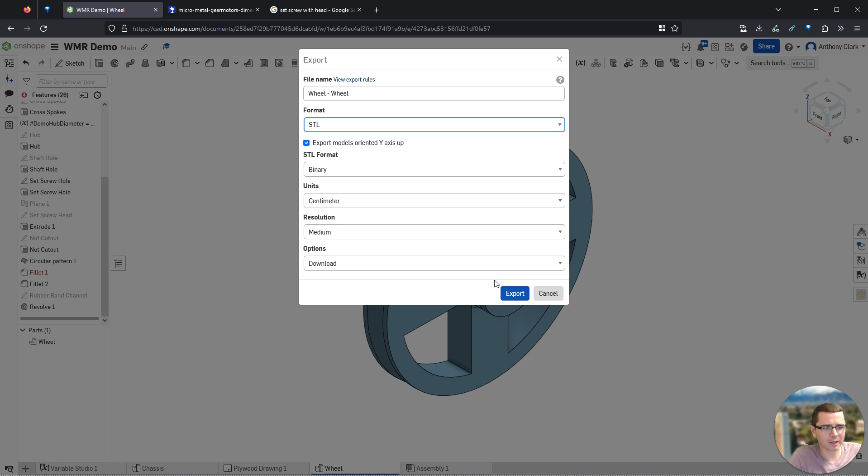The final part here is to right-click, export, and the 3D printers at the makerspace will take both the 3MF format and the STL format. The STL format's been around longer, has a couple of annoying things about it, like it doesn't actually embed the units, so you'll have to remember that you used centimeters. 3MF does embed the units, but almost every printer that exists is going to work with STL, so it's a little bit safer to export into that format instead.

Alright, happy 3D printing and laser cutting.